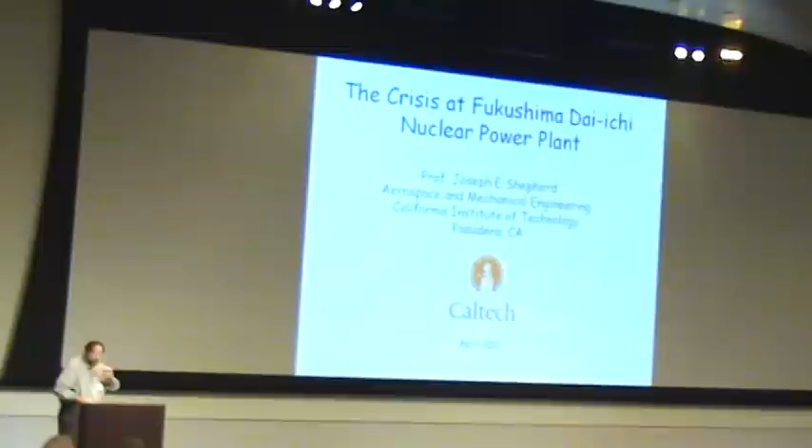But what this talk is all about is, I call this sort of Fukushima for scientists and engineers. So you've heard a lot of things on the news, and there's been a lot of so-called experts that get up and talk about things. And as I watched that stuff, my wife watched me getting disgusted, and she said, you know something about it, why don't you stand up and talk about it? And so that's one of the reasons why I'm here.

And there's a couple of purposes in this, and one is to give you an understanding of the reactor systems and how they're supposed to function, and then an understanding of what could have gone wrong, with a little bit of speculation, but actually I don't have any secret knowledge.

And so all I'm going to tell you is things that I learned off of, as they say nowadays, scraping the web and talking to a few people who are inside the nuclear industry, and my 30 years of experience in thinking about nuclear reactor safety, which started even before that, when I was a graduate student who worked at Oak Ridge. So here we go. So there's a number of nuclear power plants in Japan.

And they get about 30% of their electricity from that. They're heavily dependent on it. And right here on the coast are the plants that were affected the most by the earthquake and tsunami. And the plant we're going to be interested in is this one particular plant, which is Fukushima #1, or Dai-Ichi, and this actually contains 6 reactors.

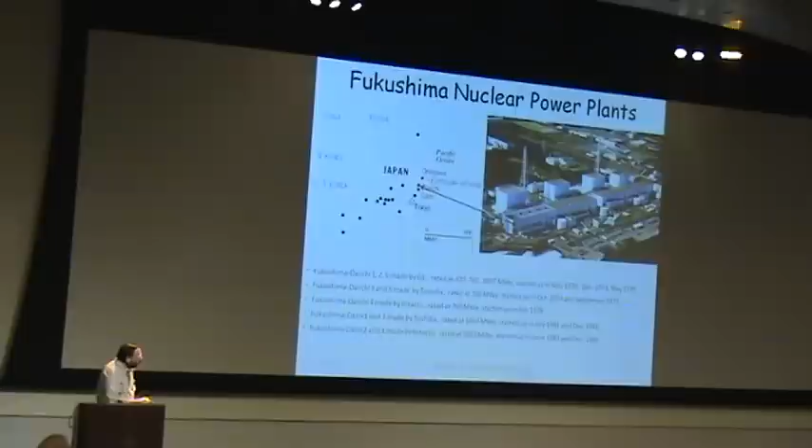These sets of buildings here are the turbine buildings, so these actually house the turbines and the generators, and there's a number of auxiliary buildings, large stacks to carry off the material. So the plants were designed in the late 50s and 60s and were built during the 60s, and the first one had its low power startup in 1970. It's been running since then. The other ones have startups that were a little bit later on in time. So these plants have been here for some time. The first plants were built by GE.

This is an audience of scientists and engineers who probably don't need this little bit of discussion, but just to remind ourselves, these are thermal power reactors, and so we have slow neutrons. The neutrons are moderated by water, and the neutrons have a large cross-section for fission when they're slow, and that means we make somewhere between 2 and 3 neutrons, a number of fission products, which are the things that cause us the greatest concern when we have a problem like we do today, plus about 200 MeV of energy, which is turned into thermal power in the form of high pressure, high temperature steam, which then produces electricity.

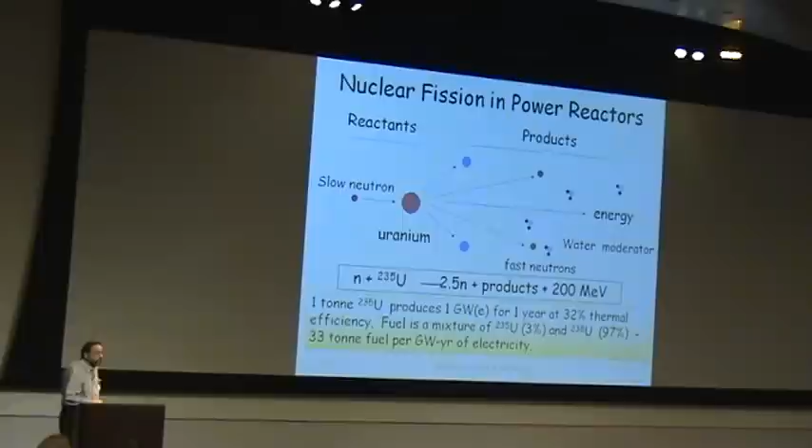And the thing that's, of course, greatly attractive about this is 1 ton of the isotope 235 will produce a gigawatt of electricity for 1 year. So that's what we're talking about here. And here's the actual internals. Each one of these reactors and associated systems consists of the following. It has a pressure vessel, it has some fuel inside of here, and it has a very large amount of water. This is a boiling water reactor. They all boil water, but in particular this one boils the water directly inside the reactor.

Up here on the top are what are called the dryers and separators, so that only the steam goes into the turbines, and then the water, after it goes through the turbines and spins the turbines and makes electricity, gets condensed by the condenser, and 70% of the energy actually goes in the ocean. These plants are on the order of 30 to 32% efficient, and so there's an enormous amount of water being circulated in here, 6 tons a second. It basically comes out of the pumps at about 180 degrees C, gets preheated, goes in the core, goes down, around, up, and out. So we're doing that day in, day out.

The capacity factors on nuclear plants are up on the order of 90 to 95% nowadays, and so these will run for probably a period of up to a year and a half before they have to go in and change out some of the fuel. So a lot of the events that we're going to be talking about have to do with how this structure and the associated components did or didn't work, and so you have to put the pressure vessel inside of the structure in order to protect it from both external events and internal events. And so the structure is a large reinforced concrete building.

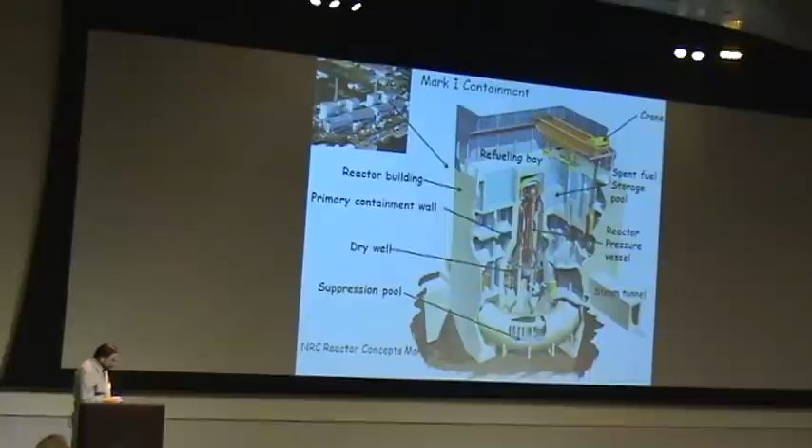One of the things you want to do is make sure if something goes wrong, that you're able to capture the fission products, and there's multiple layers to do that. One of the most important layers is the containment structure. And the first containment is the zirconium around the fuel rods, and they're actually pins, and there's thousands of these pins. They're grouped together in assemblies of about 63 pins each, and then you have several hundred of those assemblies. So that's the first barrier to the fission products, and it's all inside of the reactor pressure vessel.

The reactor pressure vessel is connected to high pressure piping and pumps, and then the whole thing is inside of the building. Here's what the assemblies look like, and so here you can see the set of pins, and they're about half an inch in diameter and on the order of 12 feet long, and they're full of little pellets of uranium dioxide, which is a mixture of the common isotope 238 and slightly enriched with 235, probably about 3%

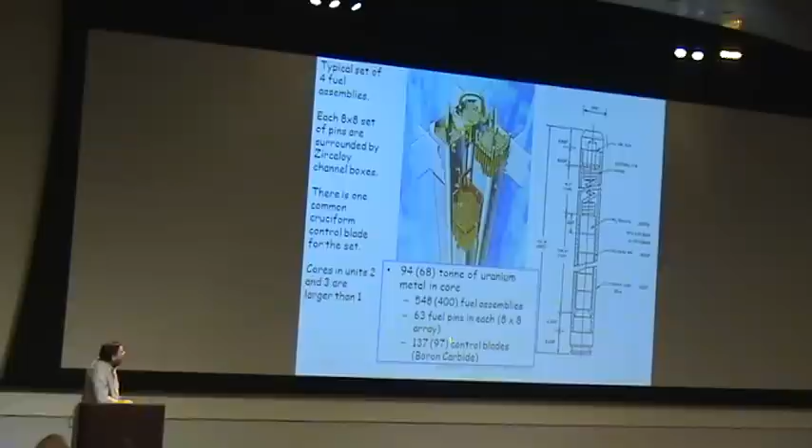for this reactor. There's a lot of uranium inside of this reactor. There's probably 68 tons in the little one and 94 tons in the two bigger ones. And in addition, there's a large amount of material that's used to control the reaction, boron carbide. And we talk about its control rods. There are rods down at the bottom, but they're actually blades here.

So here's the containment structure. This is a reactor that was built in the United States some time ago, but still operating. It's called Browns Ferry, and it's in Alabama. And this is the sphere. So the reactor pressure vessel is inside of here. You can imagine this reactor pressure vessel, which is about 20 meters high and 5 meters in diameter, sitting down inside of this structure. This structure itself is a pressure vessel that holds a little bit less pressure.

So the reactor pressure vessel itself is holding 70 atmospheres. This is designed for 4. We probably can go up to 8 and fail at some point beyond that. In addition to this sphere and this cylinder, there's a head that goes on the top, and that allows it to hold pressure. There's a number of hatches that seal it up. There's a lot of piping that goes in and out, and then there's a large torus down here in the bottom. You put a pool of water in that torus, and that plays an important role when you have an accident in terms of removing fission products and heat.

The whole thing is embedded in a very large amount of concrete, and that pressure vessel that we saw, that very substantial looking structure, doesn't even show up here. It's just a little thin line, and then there's all this concrete around it. And there's a whole lot of equipment and passageways that's not being shown here. We're showing the skeleton of what we have. And so this is called the containment vessel, or the primary containment.

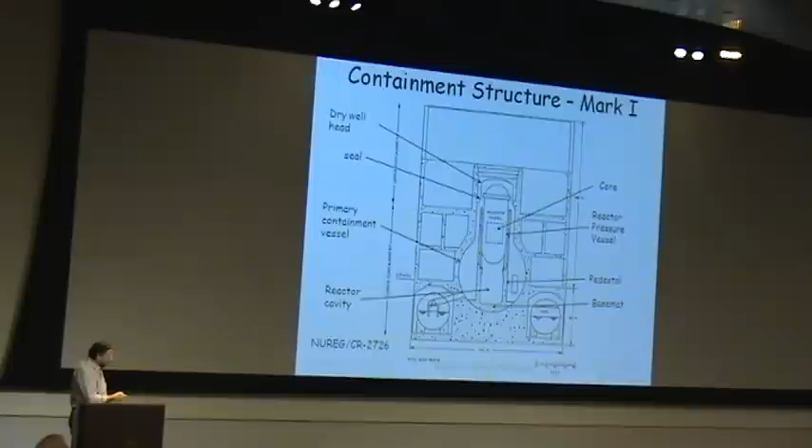And then here the cross-section of the torus. And then there's vent pipes that connect the sphere to the torus. And the notion is that this water will provide some suppression of any steam transients that get created. And then this volume will accommodate some of that. And then you have things like sprays in there to reduce the pressure.

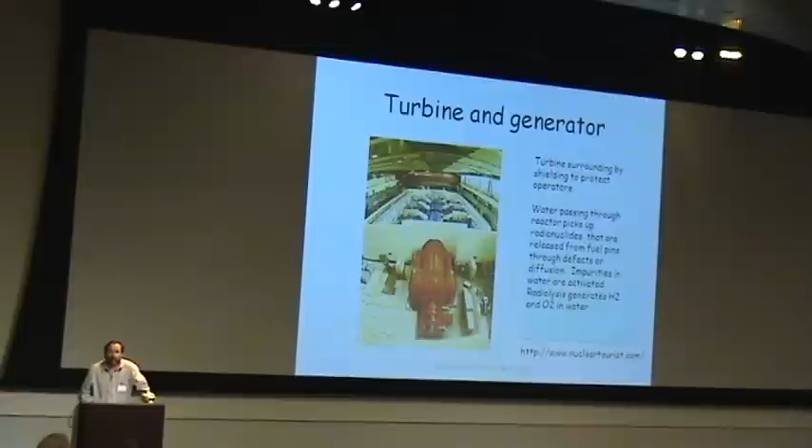So now the thing about the BWR is that it doesn't have a secondary heat exchanger. The PWR, which is the other kind of reactor that was developed by Admiral Rickover in the nuclear navy, was developed by Westinghouse. The PWR has a secondary heat exchanger. Actually, usually has several secondary heat exchangers. And the PWR is quite a complex design. And the BWR was actually developed as a civilian effort that came out of Argonne National Lab and Idaho National Laboratories. And the idea was to develop something that was simpler, a little easier to control. You didn't have to worry about having all the pressurizers and secondary heat exchangers and so on.

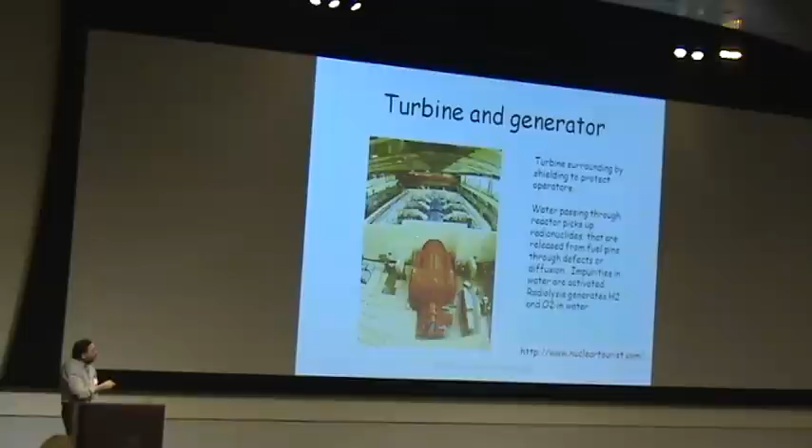But the drawback is that water that circulates inside the core also goes right into the turbines, and so this water picks up radioisotopes, and any impurities in the water can be activated. So it is radioactively hot, and that's why you have this large amount of shielding around the turbine. You've also heard discussions perhaps on the news about the water in the basement of this room being highly radioactive, and the water in the basement probably came from the 138 tons of water that's circulating through the system that comes directly into here.

So how do we control the reactor? The reactors are systems that you'd like to have negative feedback stability on. It's an obvious thing that you want when something has extremely large amounts of energy. You'd like that when you have a small perturbation, the system adjusts itself, reducing or increasing power to come back to the operating condition.

One way you do that is by designing it into the reactor, an engineering feature having to do with the neutronics and thermal hydraulics of the cooling. But the other thing you can do is actively put in control blades. Here are the control blades, these cruciform shapes, and control rods pushing up into the core, with a very large number of penetrations in the bottom of the reactor.

Nuclear engineers sometimes like to say that the BWR is an unnatural creature because the control is accomplished from the bottom rather than the top, as it is in the PWR. But if you put them in through the bottom, it's very easy to take the head off the top and exchange the fuel.

So one of the things they pay a lot of attention to is making sure they have systems to insert the control rods and the reactivity-controlling boron carbide blades very quickly in case of something like a large earthquake. There's a huge amount of machinery both in the turbine building and in the reactor building itself.

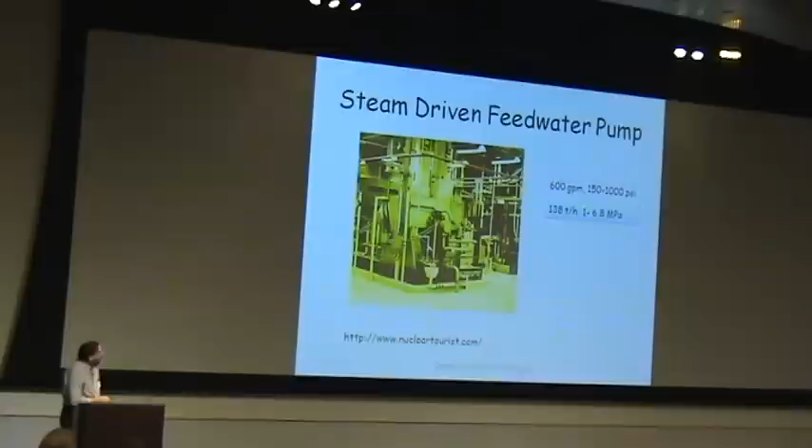For example, pumps that can move this massive amount of water around. In this case, this is a pump we'll be talking about a little later on. It's not driven by electricity, it's driven by steam, and it can actually move 138 tons an hour, which is not as much as 6 tons a second, but it's substantial.

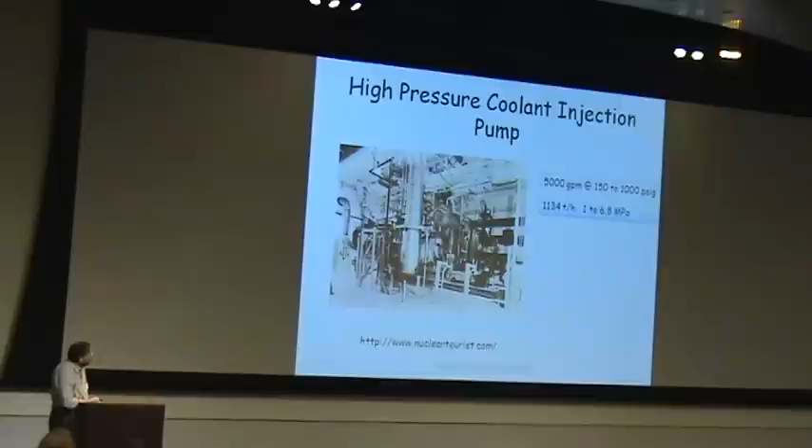Here's a high-pressure coolant injection pump. These are safety features, and these last two pumps I showed are actually not ones that are ordinarily used. These are not the feedwater pumps, but they're actually safety features.

We have additional safety features, and one important thing is it takes a substantial amount of electric power to run the instrumentation, the pumps, and the valves. You often worry about things like an upset in the grid. Surprisingly, even though you're generating hundreds of megawatts of electric power, you're relying on the grid itself for stability—you don't want to rely on your own ability to make that electric power to run your equipment.

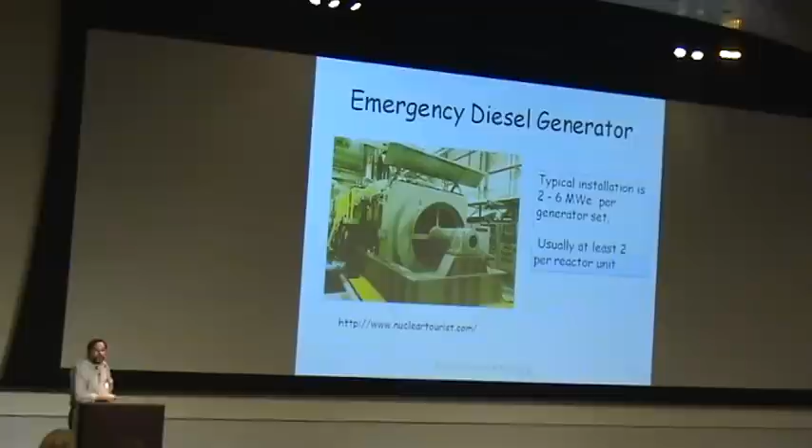So what you have are backup diesel generators, and not just one but multiple backup diesel generators. In this plant, probably between the 6 plants, it's something like 13 backup diesel generators. They're enormous things, generating somewhere between 2 and 6 megawatts per set.

Finally, if things really go south—the thing about backup generators, if you have experience with those, it's like starting a lawnmower after leaving it out in the shed all winter. You're probably going to have to drain the gas and make sure it actually will start. They spend a lot of time doing that.

Nevertheless, when you have equipment that runs intermittently, there are always issues about reliability, so they also incorporate a very large supply of batteries and inverters. They can run certain critical parts, but it's really only key instruments and controls—you obviously can't run those big pumps off of them. That's one of the issues here.

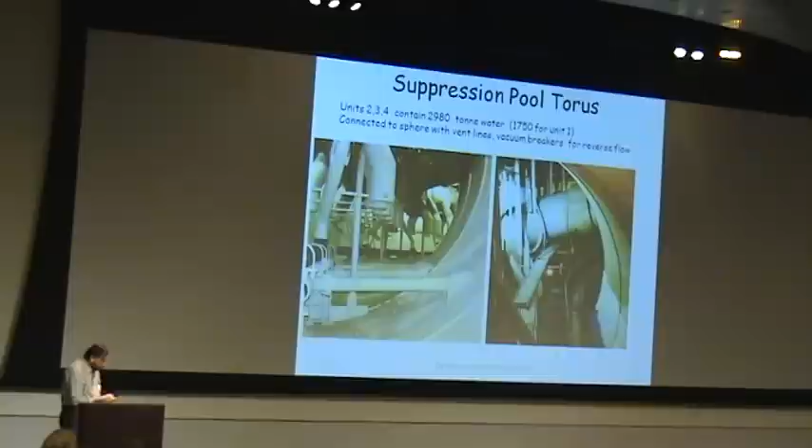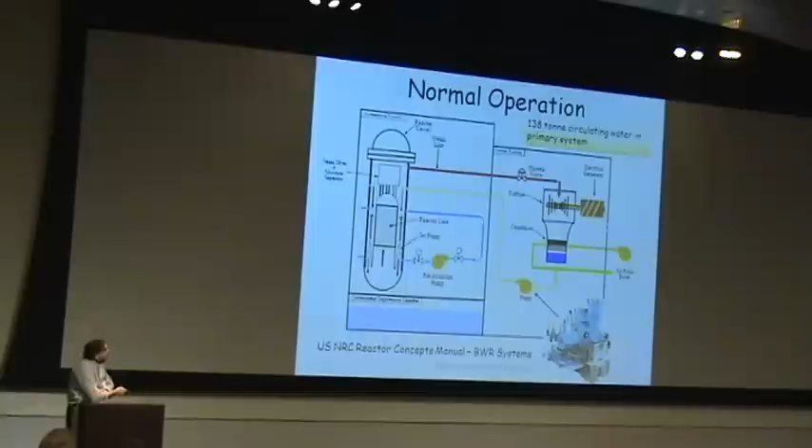Everything's happening just fine, and all of a sudden it says, okay, now stop. Any number of reasons why this could stop. It could be some kind of an upset in the feedwater. You're monitoring a lot of different conditions. You can imagine it's a very complex engineering system. There are many, many things that could trigger a shutdown, and it doesn't have to be an earthquake.

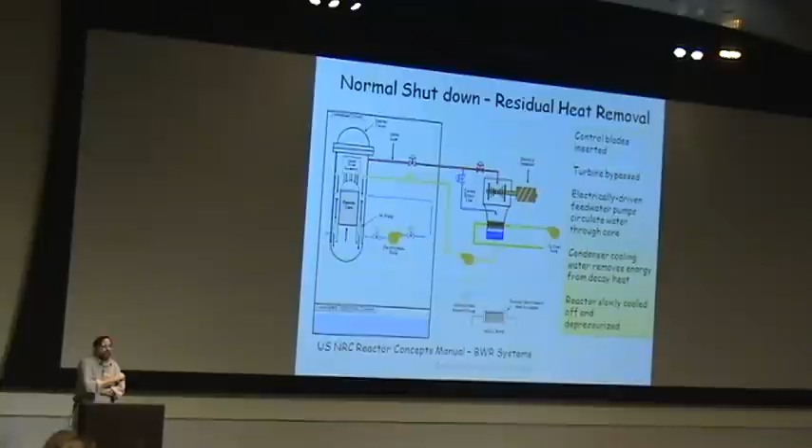An example is Three Mile Island, there was some kind of an upset of the feedwater. It's not really clear to this day what that upset was, but that triggered the whole event.

So once you get an upset, then what do you do? Well, immediately you push in the control rods, and those boron carbide blades go up into the reactor core, and you stop almost all of the heat from coming out.

And that's an important point. It turns out you can't completely eliminate all of it. All you've really done is try to intercept all of the neutrons, and you spoil the whole chain reaction that's taking place, but you're left with a problem that it's still quite hot, and also it turns out there is some spontaneous radioactive decay you have to take care of.

So you still have to be pumping water around here, and you continue to do that, but you bypass yourself around the turbine, and you close this main steam isolation valve, and you run through your condenser in the usual way, and you also have to be running the water in from the ocean.

So this then goes on for some time. You have to do this for a period of weeks to get this thing cooled down to the point where you get to actually what they call cold shutdown, and you can pull the head off of it and start working on it.

So now, what's the concern? The concern here is that what we're doing is we're burning U-235. We burn the U-235 in sort of the loose chemical sense, and we have these interactions with neutrons. We're making a lot of stuff that we would really rather not have, and those are the fission products. And so we don't burn all of the U-235. Some of it's going to be left after the fuel spends about 3 years in the reactor.

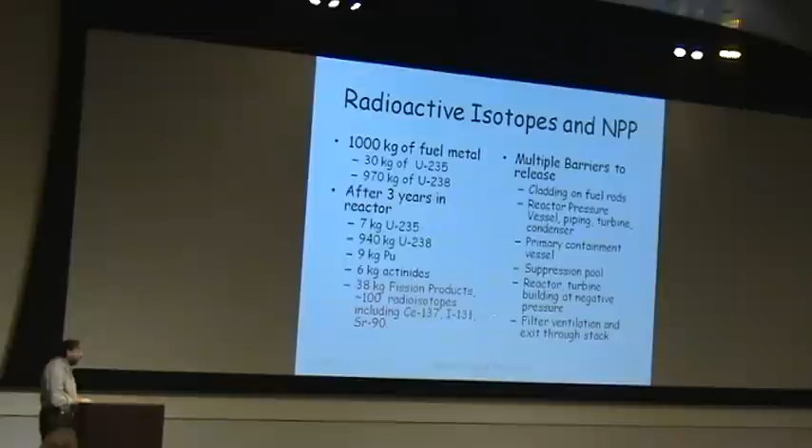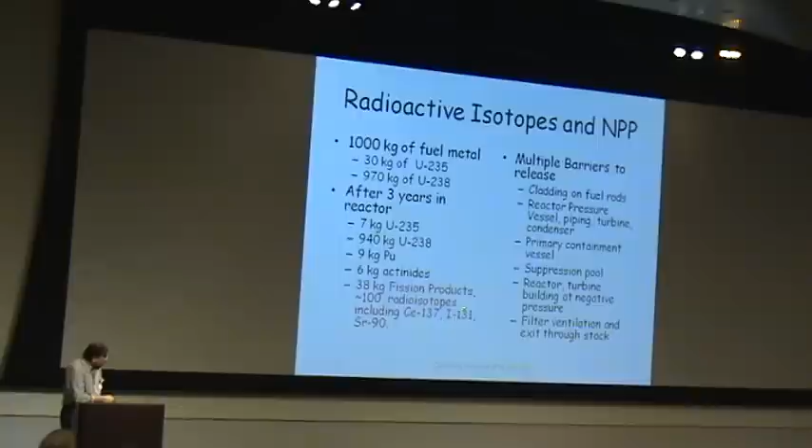And then there's a lot of things that you really don't want to get out in the environment. In particular, you've heard a lot of focus on things like cesium-137 and iodine. It's a lot per core. 38 kilograms is an enormous amount of radioactivity because the decay rate, for example, in the iodine is 8 days, and the cesium is 30 years, so it's pretty intensely radioactive.

The problem is that some of these materials are undergoing spontaneous decay. Fission products are the juvenile delinquents of the atomic world. They're unstable. They have too many neutrons. They have to get rid of the neutrons. They undergo beta decay, and when they do that, they release about one MeV of energy per each decay. There's a decay chain, and it might be, say, seven nuclides long before it gets to a stable compound and stops. So it's not going to stop till it gets to stability.

That can take, in some cases, tens of thousands of years, but for many of the fission products, they decay very quickly, and all that decay comes with energy. As soon as you shut down the power to the reactor by inserting the control rods, you're still left with this decay heat, about 7% of the full thermal power. In Unit 1, we were making 1,380 megawatts of thermal power, and even shut down as much as possible, we're left with about 90 megawatts right at that point.

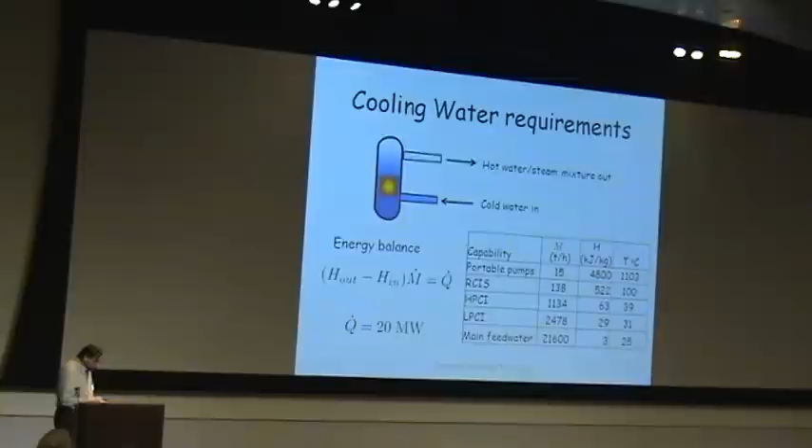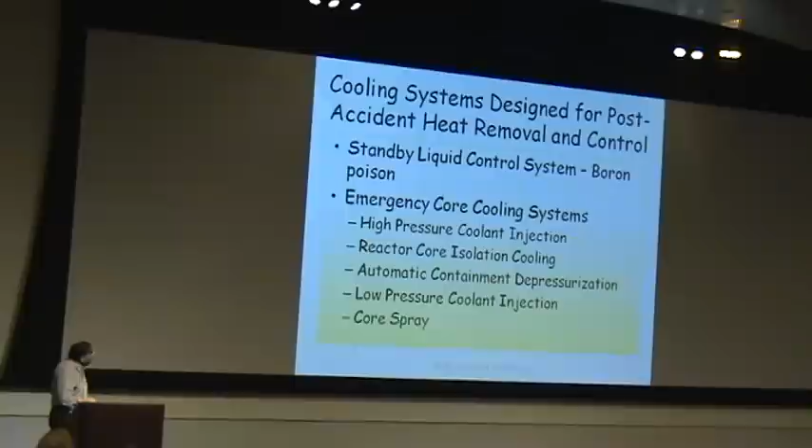So what do you do? You worry about that a lot. You say, okay, I'm going to put all kinds of systems in. First of all, the control rods go in. I'm going to have some boron poison I can flow in there to get rid of it. If the main cooling system fails, I'm going to have 1, 2, 3, 4, 5 different kinds of things I can do. So that is fantastic - you have a lot of backup systems, lots of duplicate things, whole trains of diesel generators and all that stuff.

But it turns out that only one of these things can work without electricity, and that's this one right here. None of these other beautifully engineered systems - the removal of heat from the suppression pool, the injection of water at high pressure or low pressure - none of those require... well, actually all of those things require very substantial amounts of electricity. And then you're left with this one device here, a steam-driven pump.

So, okay, now you are all experts on nuclear power and nuclear reactor safety, and now we're going to walk through the accident.

When the electrical grid fails and the plant shakes that much, you have multiple sensors telling you something very bad is happening here, we are shutting this plant down. At that point, the reactor shutdown was initiated. One cause of concern, of course, is then there's a very long series of aftershocks. Today, this morning, late at night in Japan, they had a very large aftershock take place. Some of these aftershocks probably played a role in the accident, although that's not clear yet.

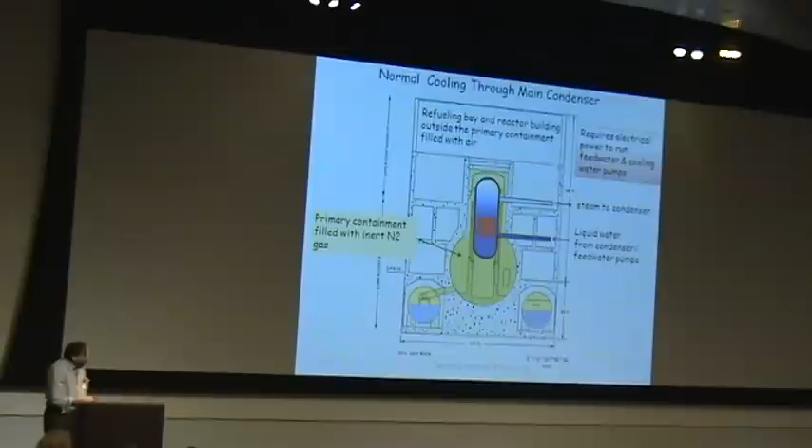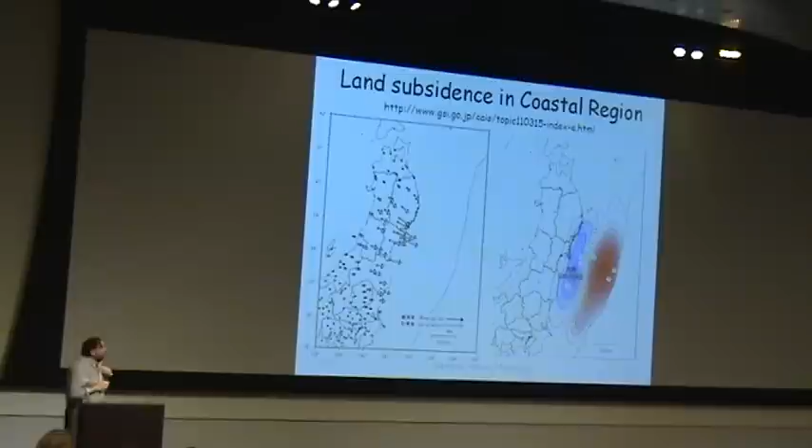So this is just an enormous series of external events. At that point, all 13 backup generators failed. Now, some of those backup generators were brought online relatively quickly, and they brought in some additional portable generators, but the generators that were most important, for units 1, 2, 3, and 4, failed. In fact, they failed in such a way that they couldn't be recovered. One of the problems was this enormous amount of damage done by the combination of the earthquake and the tsunami—this is a lot of debris that was up on the dock.

So here's the accident progression. The Japanese have been excoriated a little bit in the press for not being forthcoming, but actually if you go look on the website—it's not clear how accurate the information is—but they publish things right down to the minute when various things happen. If you go to the Japanese Nuclear Safety Agency, you can get a lot of this information, which is what I've done. Some of the information seems to be a little bit anecdotal.

But here we are: the reactor shut down when the earthquake happened at 1446, then we had the shutdown, we're shut down, and then the tsunami reaches. After the tsunami reaches, we suddenly find we're in a situation where we have to rely on batteries, and that is a very serious thing, because now you can't run any of these systems except for just the one heat removal system that you have.

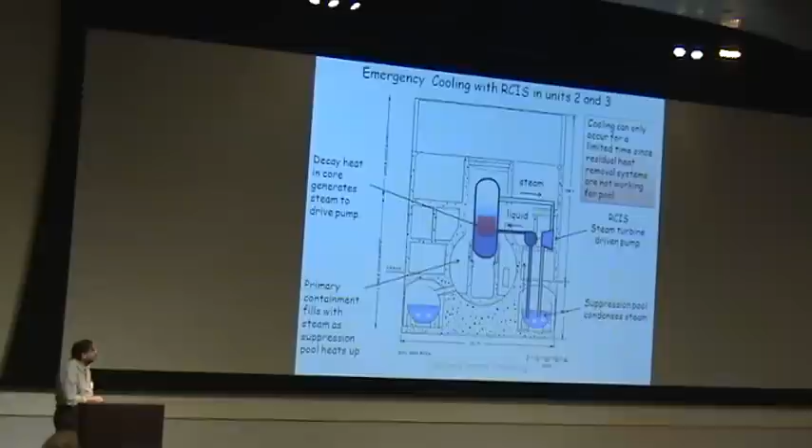At some point, you're going to start boiling the water and pressurizing the primary container, which is still supposed to be full of nitrogen unless it started to leak out during the earthquake. All this is very alarming, and the Japanese had been through a very serious accident in 1999 at a reprocessing plant where there was a lot of miscommunication.

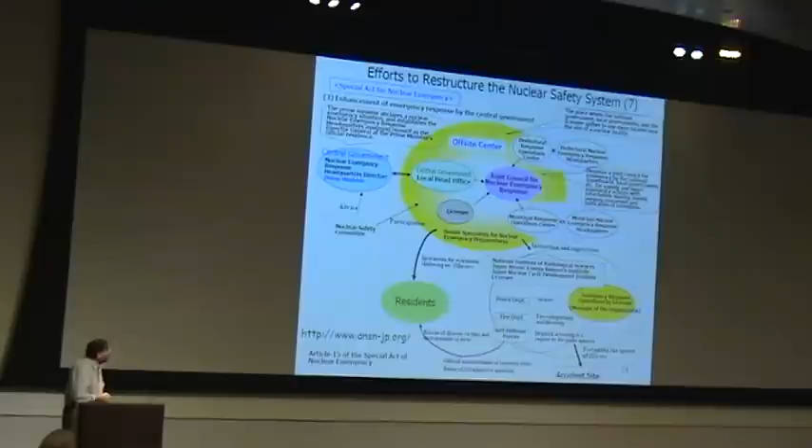It was very badly handled, and as a consequence, they constructed this system of notifications. So this is what's supposed to happen. There's a whole lot of people involved. Societies are complex, and you're going to have to tell a lot of people what's going on, and figure out how to deal with everybody: self-defense forces, fire department, police department. They said these things are such a challenge to our society that at the end of the day, we're going to kick it all upstairs to the Prime Minister. That's why you see the Prime Minister on television. As I say when I give this talk, it's a good thing he's a physicist, so he can evaluate all of these things he's being told. Hopefully he has a whole lot of other people giving advice about that, which I'm sure he does.

So this is the system they have. Now TEPCO's on the phone to the ministry, the ministry's on the phone to the Prime Minister, and they're saying: here's the deal. We're pushing steam into these suppression pools, boiling the water off the pool we're using to condense it, and we've gotten to the point where we can't cool it anymore. What are we going to do?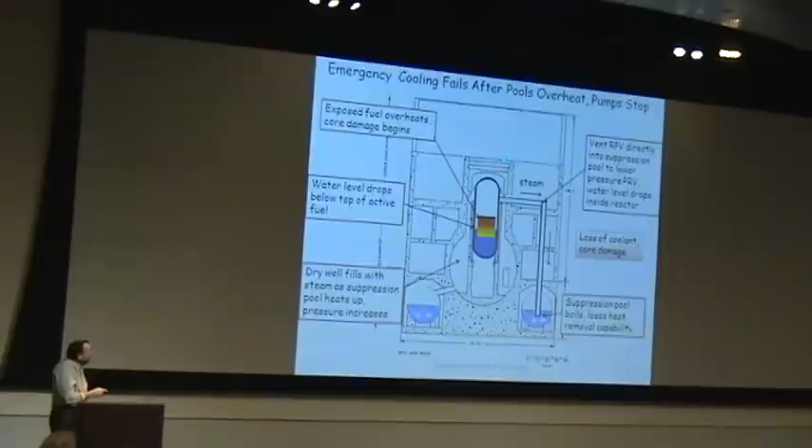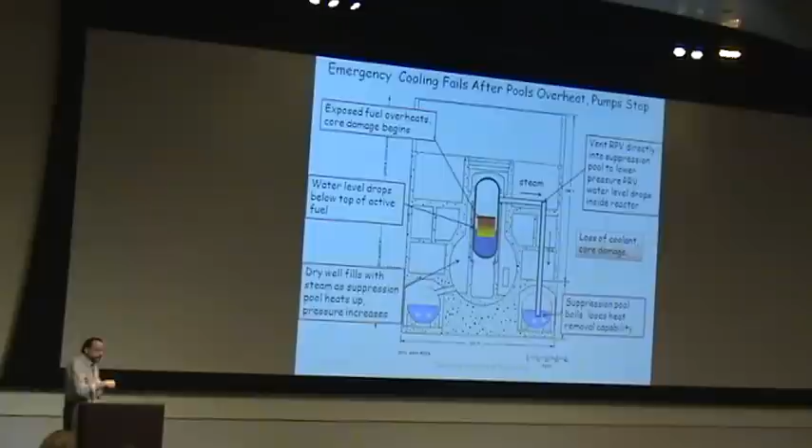Well, one of the things you don't want to do is fail this reactor pressure vessel—that's one of your lines of defense. You also don't want to fail the other line of defense, the outer containment vessel. So in order to keep the pressure from going up, you have to get rid of some of that steam. When you get rid of some of that steam, it's the same thing that happens when you take the top off a pressure cooker—a lot of steam flashes and you start losing inventory, so you start uncovering the core. It's more complicated in the BWR because it has a lot of steam anyway, but you end up with a lot more steam and a large portion of the core uncovered.

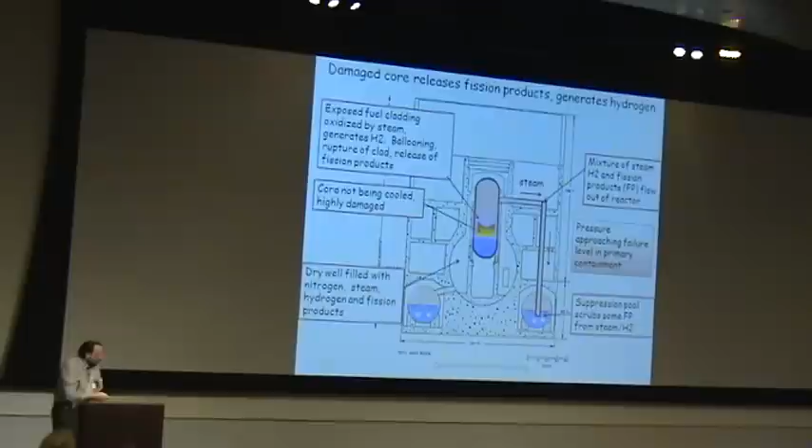So now the really bad thing begins to happen. This is where I came in—not that I did the bad thing, but this is the part I spent a lot of time thinking about when I was at Sandia Labs. What happens is if you get the core too hot—remember you've got all these little pellets the size of your fingertip, tens of thousands of pellets of uranium dioxide, inside a zirconium rod with cladding only 1 millimeter thick.

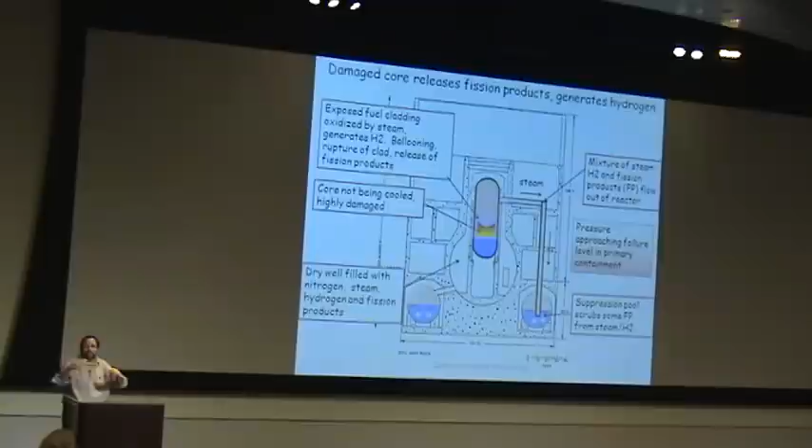If you get that too hot, it turns out all those fission products—a lot of them are gases, like krypton and xenon—are at high pressure, and they cause the cladding to balloon and rupture, releasing the fission products. At the same time, the zirconium is getting hot, you've got steam in there, and the steam oxidizes the zirconium and makes hydrogen. So now you've gone from a worse situation to a really terrible situation.

You've still got nitrogen in there, so you say, thank God I filled the whole thing up with nitrogen. But then the reactor pressure starts going up. So here we are on Saturday—the tsunami and earthquake happened Friday, and now it's Saturday. They're measuring the pressure, the estimates are still coming in, and they're at 600 kilopascals, now 800 kilopascals. Remember what I said—this is inside the primary containment. It's designed for 400. You start to worry about it failing when it gets to 800.

It probably will definitely fail at 1,000. And so here you are getting ready to fail. All right, so what do you do? You say, well, what we're going to do, we're just going to let some of that steam out of the primary containment. Now, that's something that people have talked about a lot with these reactors.

The problem with it is this, that you're going to release fission products directly in the environment. You hope that some of those fission products are going to go through the suppression pool and get scrubbed out, but the fact of the matter is a number of those will probably just go right on through and out in the environment. The other problem is, where is that going to go? Where are you going to put this material?

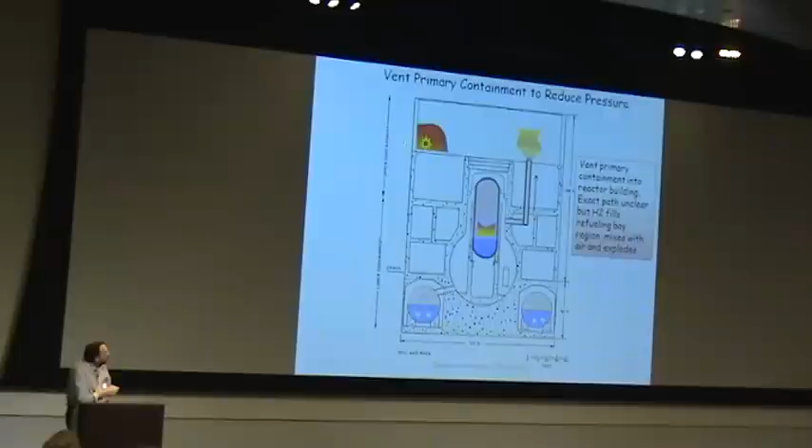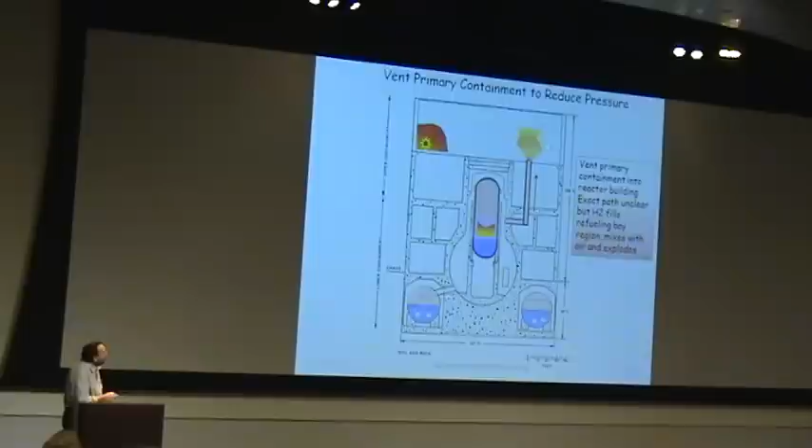So we had to vent directly out of the primary containment, and we had to vent into the reactor building, and this reactor building is actually designed to fail gracefully. Now, it didn't fail gracefully. You saw the pictures. The first one failed more or less gracefully, if such a thing is possible. But that means you have a very low overpressure failure for the panels that are on the top here. But then you're going to have to deal with resulting debris and damage up here, because this is also where you have the fuel.

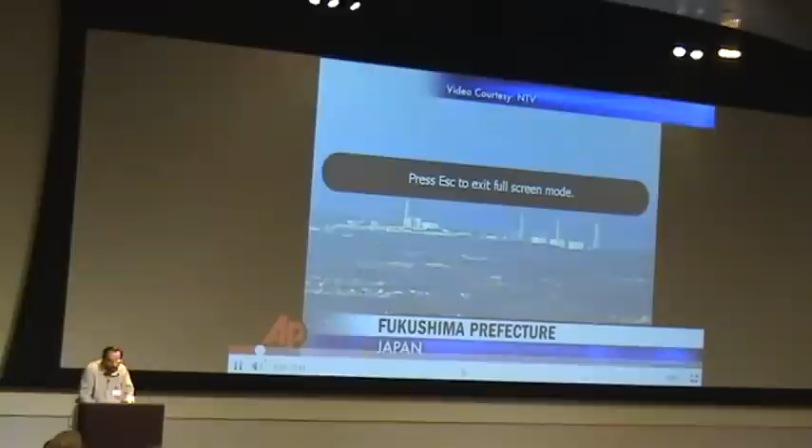So, here's the explosion. It was pretty horrifying to see this if you're involved in engineering, and it's the kind of thing that just absolutely should not happen. And if I can get this thing to talk to the web and pull this up, then you can see what this looks like. So here's where it'll play this back in a minute. So you can see this enormous cloud here.

So what is that cloud? Well, that cloud is probably a lot of pulverized concrete and steam, because the panels, even though they're blowout panels, the panels are made out of, there you go. And you can see there's a tremendous jet that went up in the air. So it was just an absolutely heartbreaking thing to see that happen, and then to think about the fact that there were all these fission products inside this cloud, which are now off drifting to the northwest, and we'll see where they wind up a little later on. So that's what happened there.

And now, so what blew up? Well, what blew up was this area right here on the top, and all of this superstructure you can see. That's all of this superstructure that was designed to hold on these panels. And so, in some sense, you say, well, the safety system worked. We blew off the panels, and hopefully we didn't damage a couple of key things we're going to need to recover this accident, which is the crane.

We didn't damage the fuel pool, and we didn't damage the reactor, which is way down inside of this, underneath this concrete shield, and the upper part of the retaining vessel. But we actually don't know. We don't know what the condition of that is. So, okay. So now what are you thinking about? Well, there's still other things that can happen.

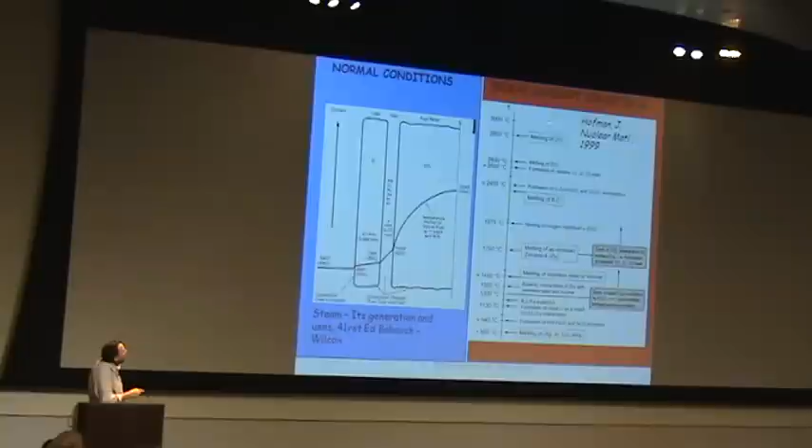So this is what you're going to have when you've got water flowing by here and you're extracting the heat. All of you who've done the heat transfer calculations will know what's going to happen if I insulate this bundle: basically we're going to float up to a common temperature, and then that temperature is going to go up and up and up until we balance the internal heat generation with the heat losses. You go from a situation where you start to oxidize the zircaloy and make hydrogen, then you start to actually melt the zircaloy, then you dissolve the zircaloy in the uranium, and then you finally melt the boron carbide. At the end of the day, you could actually get up to these kinds of temperatures. You could melt the uranium dioxide, and that forms a eutectic with this zirconium, and it drops down into the bottom of the core.

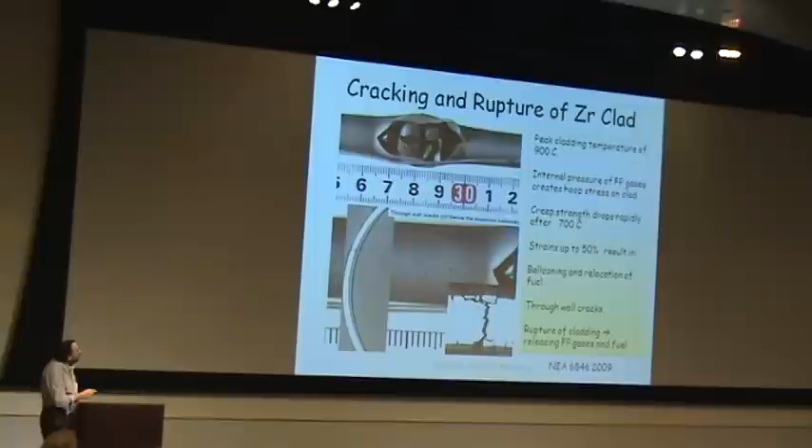This is the kind of thing that can happen when you just have a ballooning and rupture of the clad, but you can also get a lot of fractures in there, and that's how the fission products get released into the water, and that's why there's so much fission products. So hydrogen comes out quickly, and of course it accelerates with temperature, and it releases energy. So it's a self-accelerating reaction. You're basically burning metal; you can burn metals in steam, and this releases a substantial amount of energy, and that contributes to the process running away.

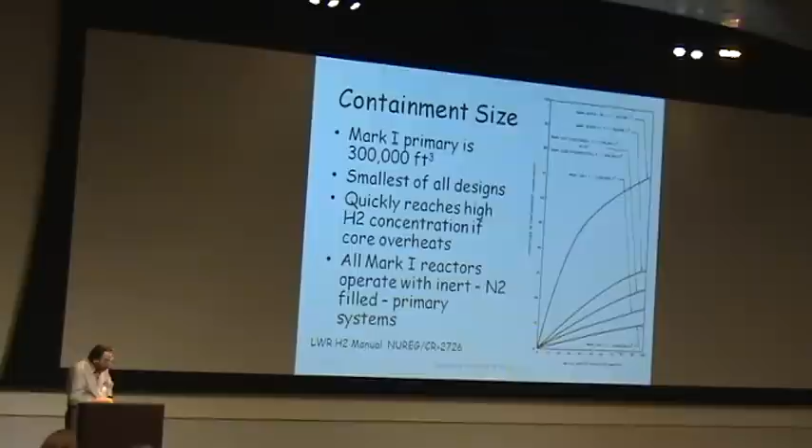Where does all that hydrogen go? Well, the hydrogen goes into containment. If you go into the primary containment on the Mark I, you can really fill it up and get a lot of hydrogen. If you have all the metal and water react, you can fill it up with 70% hydrogen. But in fact, we're not going to fill up the containment. After we fill up the containment, we're going to vent it out into this reactor bay, which is about 1 million cubic feet. So the concentration is not quite so high, but the concentration is still extremely high.

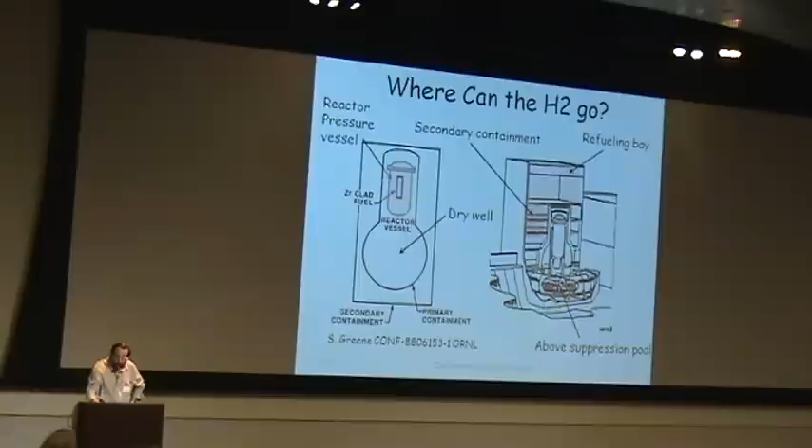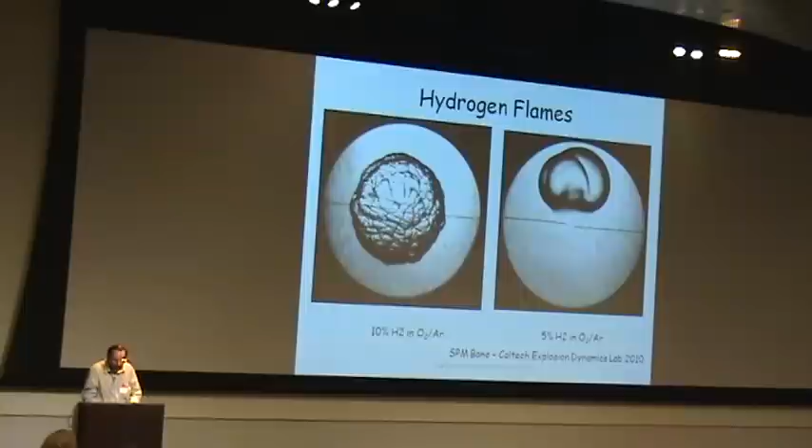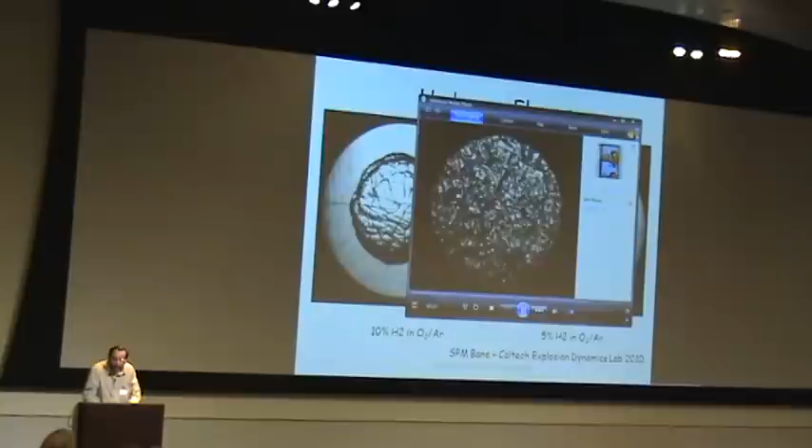What does happen is if you have a very low concentration of hydrogen, you get a buoyancy effect. These are some pictures of flames taken with high-speed video in my lab. Here's a picture that shows what you have with about 10% hydrogen, and you can see this very corrugated, convoluted surface because it's naturally unstable. If you go down to about 5% hydrogen, you have a substantial effect of buoyancy, and you create a vortex inside here that drags the flame up to the top. You still get very substantial overpressures.

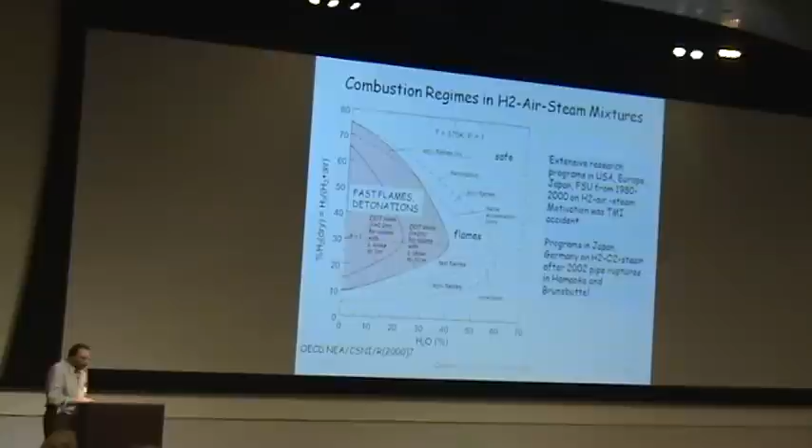So here we are, failed the secondary containment, but even worse things can happen. Those low-speed flames in the pictures I showed you are only going a few tens of meters a second. If you have enough hydrogen concentration and a small enough amount of steam, you can actually get detonations with very high-speed combustion, moving at 1,600 to 2,000 meters a second, and this produces an impulsive type of load and a much more destructive event.

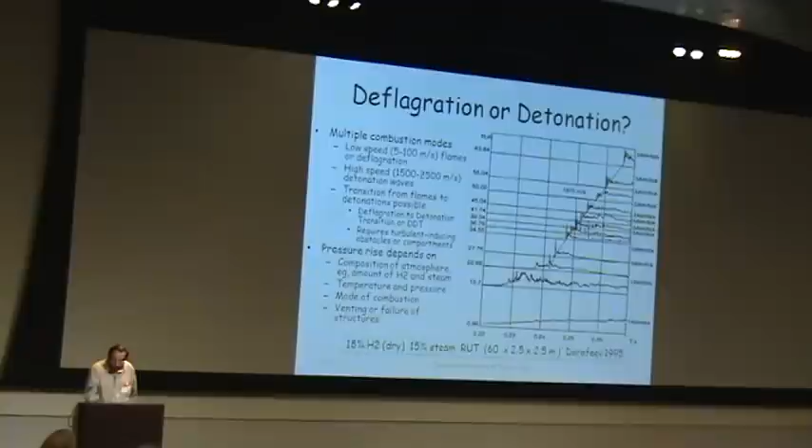So, next unit, unit 3. Here we are in unit 3, and one of the things happening is we're running on batteries. We still haven't been able to recover, so now we're into Sunday. This all started on Friday afternoon, goes into Sunday, and now we find that successively the batteries are running out, and in addition, the reactor core isolation cooling system fails. So now we're beginning to wonder what's going to happen. It's still working in Unit 2, so Unit 3 is failing, Unit 2 is still working.

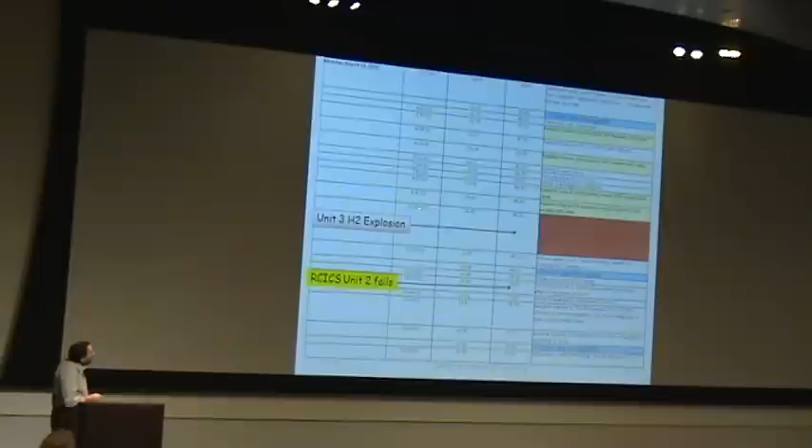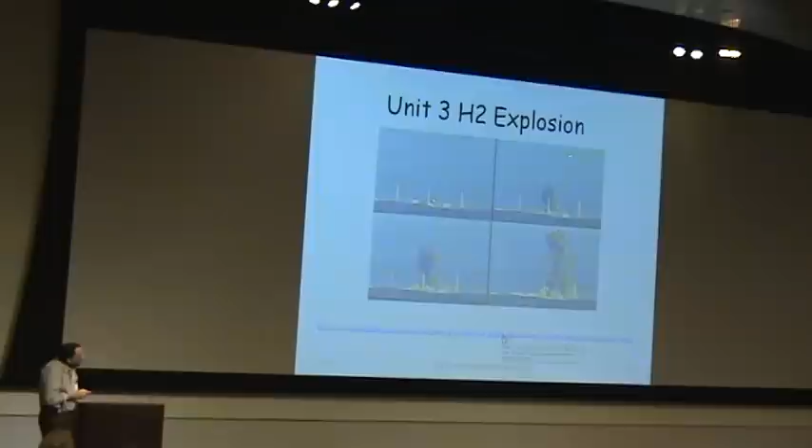I tried to estimate that, but maybe we went up 500 to 700 meters, just the visible part of it. And that's extremely energetic. So, what are those towers? What's that? Those towers? So these towers are the so-called, there's the top of the cloud, you can see.

These towers are what are called the stacks, and what they do is they take filtered air out of the reactor buildings and the turbine buildings, and see that little flash of flame right there? It's an enormous cloud, and then you can see bits of stuff that come falling back down. It's just unbelievable.

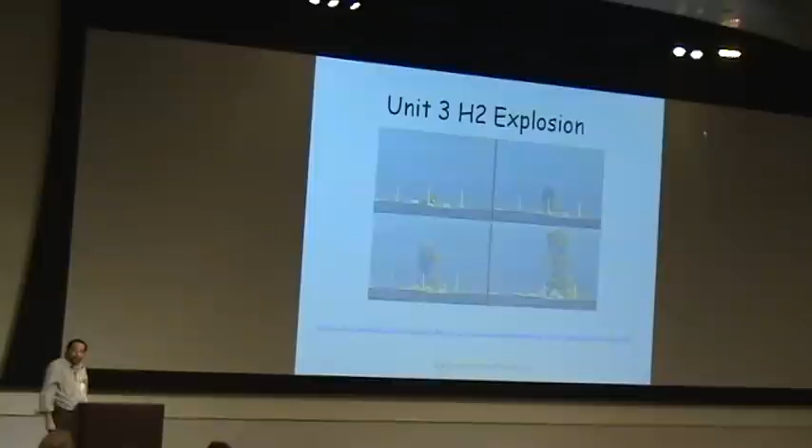So what those stacks do is that you have to ventilate the buildings, and you have to filter out the particulates, and you have to try to trap out any of the radionuclides, and so you run it through some HEPA filters and some activated carbon, and then you try to push it as far up in the atmosphere as you can so it doesn't come down in the local vicinity. So that's what the stacks are for. This is the result. It's pretty horrific.

So what it did in this case was, now you can see that superstructure is not left at all. The superstructure, in fact, has fallen into the reactor, and what's an even greater concern is it's fallen into where those spent fuel pools are. So now we have two reactors that have destroyed the superstructure. This reactor number 3 had this enormous explosion that's heard 50 kilometers away.

And now what's next? Well, what's next is we're not done yet, because reactor 2 is still sitting there. And what happens is that we successively, very quickly have events in reactor 2 and reactor 4. It's really not clear what happens in reactor 2, but apparently there's something that was not good. There was an explosive sound near the torus. And then reactor 4, now reactor 4 doesn't have any fuel in it, so what's going on there?

Well, it doesn't have any fuel in it, but it has about 1,000 fuel assemblies sitting in the water in the spent fuel pool, because they're working on reactor 4. They took the assemblies out so they could go in and work on what's called the shroud. And they've been busy working on that. They have to store the fuel somewhere, and so that pool is quite full of fuel, and that fuel was taken out in November, and so it still has a substantial amount of decay heat, and so there's a concern about what's going on there.

So what may have happened is that the water may have boiled off of the pool to the point where we exposed the cladding. Do some rough mass energy balance calculations, probably take about a day. We're no longer cooling the rods, and they start generating hydrogen with the steam that's coming off the pool underneath that's boiling. You make hydrogen, the hydrogen starts to burn, so you have a fire. So this is a very bad thing to have, of course.

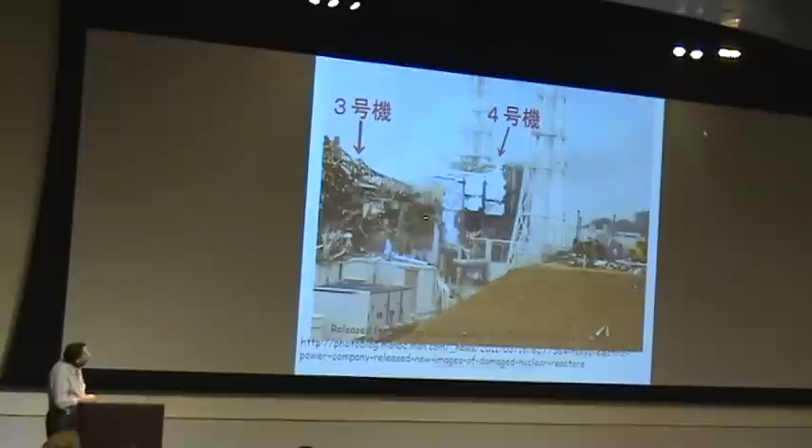And then, in addition to that, you seem to generate a lot of hydrogen, which gets into the reactor building and has an explosion. The upshot of all this is that it severely damaged reactor 4. So here was that for reactor 3. You can see how a lot of the material has just been completely torn off of here from that enormous explosion. But here's reactor 4 now, and reactor 4 has a very large amount of damage into it also, so it had both a fire and an explosion.

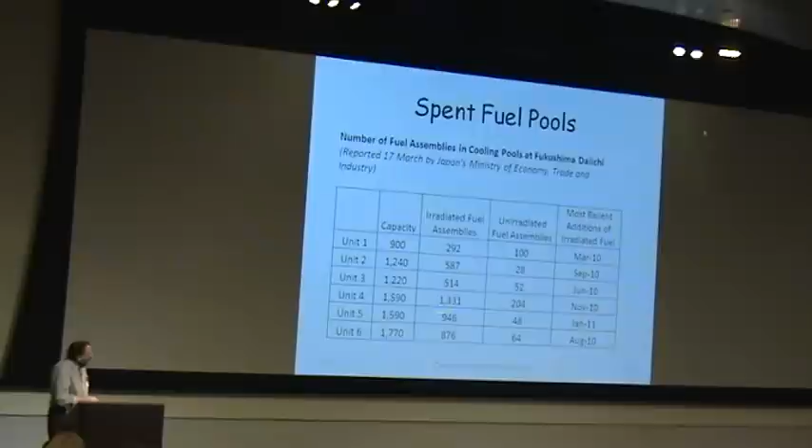And you can see here, for example, into the building, and this is a piece of the crane, and you can see all of the panels have been torn off and the roof is collapsed. So this is looking down on unit 3 again. Here's looking at unit 4, and here's what the real concern is: the spent fuel pool in unit 4, which has the 1,330 irradiated fuel assemblies, and the last addition was probably on November the 10th, when they took the entire core out. The entire core is about 500 assemblies in units 2, 3, and 4. So a very large amount of decay heat there, and that's why those fuels have to be kept cool.

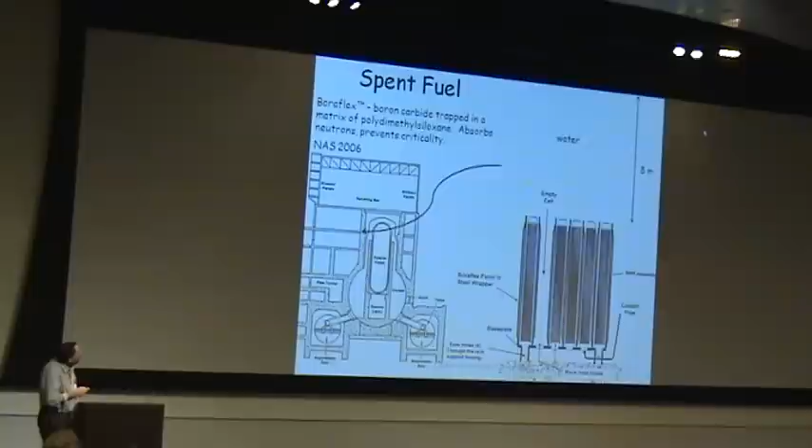And what's going on in those pools? Well, the pools are here, roughly speaking, and down at the bottom there's about 3 or 4 meters of these fuel rod assemblies. They're put into racks. The racks are separated by what's called Boraflex. It's a polydimethyl siloxane, which has some boron in it, which is a super absorber of neutrons, and then there's a whole lot of water on top of it as a biological shield.

And what's happening is this is sitting here boiling, because ordinarily you have to run a heat removal system, a heat exchanger running to pull out all that heat. You've got 10 megawatts in this pool, just like you do in the reactor, because the reactor itself is hot. You can figure out what's going to happen there, and it's going to be something bad.

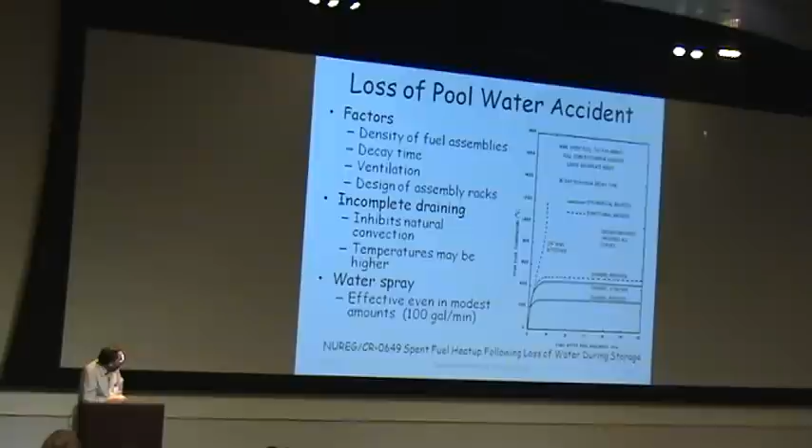This is an example of what can happen if you remove the water. After you've drained the pool out, you'll start to have a self-accelerating reaction, and you'll go up very high in temperature. If you remember this number, 1200 degrees, that's when you start to make hydrogen. So there was a very substantial fire, and now this building has exploded and burned down.

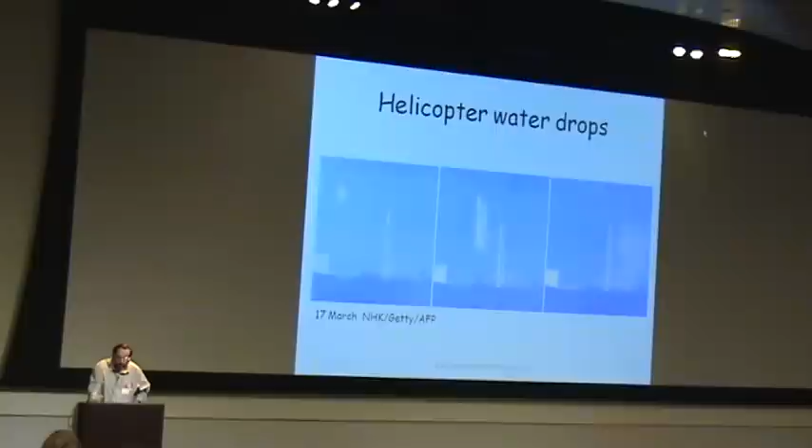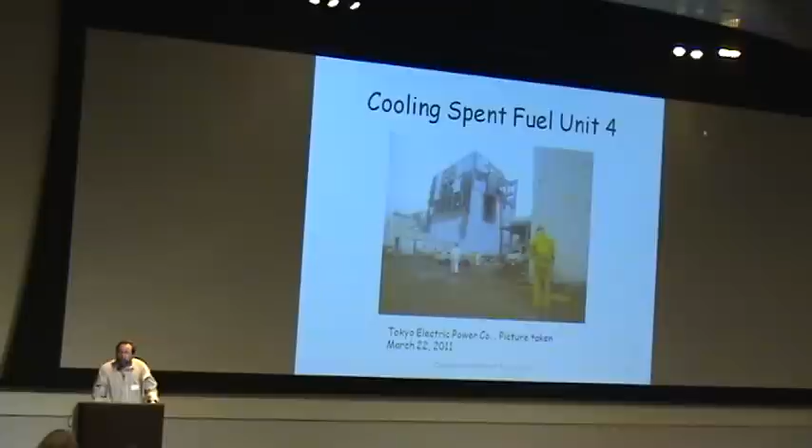And the final solution they came up with is these specialty concrete pumping trucks. There's a stroke up here on the top, and what they're doing is running fire line coming from a pool where they have some temporary storage. They started out with seawater, went to fresh water, and all the way up into the top is now pumping water into that pool. That pool holds about 1,000 tons, so you need to be able to put the 1,000 tons in there, and then replace whatever is evaporating because you don't have your heat removal system working.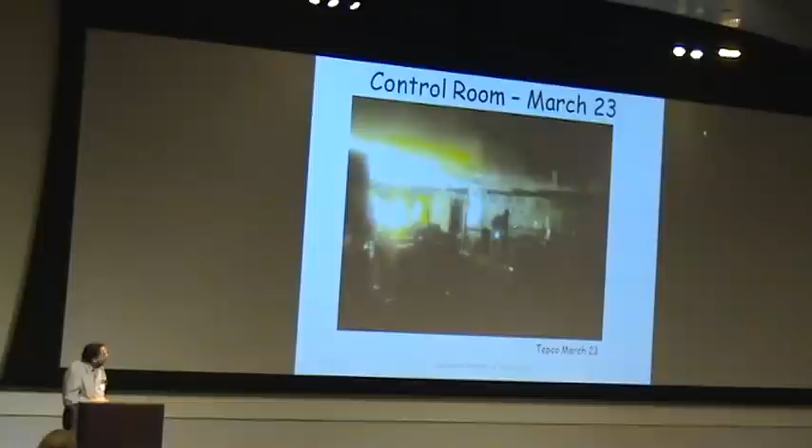You're trying to figure out how to do all this stuff under absolutely horrific conditions. So here you are in the control room in the dark, and it's radioactive, and you've got your suit on, and you're trying to piece together what has gone on here. Just absolutely horrible conditions to try to do engineering.

And finally you get the lights back on, but even then you're standing around looking at a lot of blank screens and blank dials, because a lot of this stuff is not working since you haven't turned power on to the rest of the plant, because you're worried about what's going to happen when you do that. You really need to go in there and inspect it, but it's way too radioactive and hot to do anything about that. You can't get in there.

So here's the current situation. The IAEA has been reading all the reports, and they have a lot of folks who think about this, as well as every other group interested in nuclear power, and they've been saying the situation remains very serious, ever since the event took place. What do they mean by that? You read between the lines, it means the situation is very precarious. You have failed all of your lines of defense.

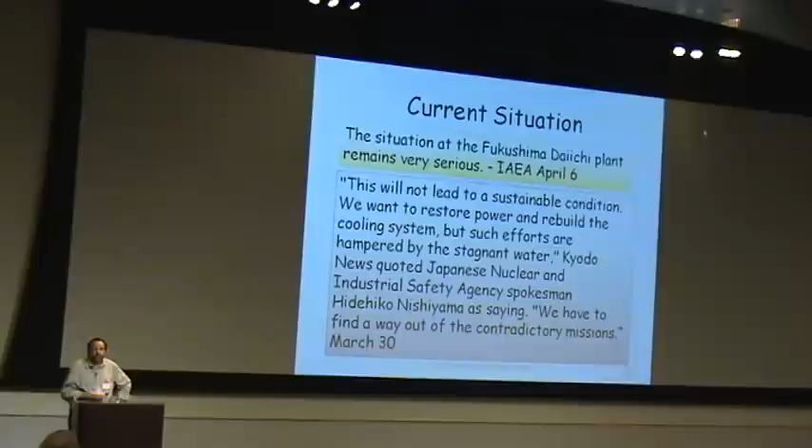You have melted the core to some extent. You have ruptured the fuel rods. You're not sure if all the pressure vessels have integrity. You're not sure if the containment has integrity. The building has certainly failed. Your ventilation system doesn't work anymore. You're blind because a lot of your instrumentation doesn't work. And what you're basically doing is just trying to hang on by putting water in there to take out that decay heat. So you're struggling with not the second law, but just the first law of thermodynamics.

So then the problem is, of course, that this is a total loss of cooling, right? You're pumping water in there and it's evaporating, or it's running off into some catch area hopefully, or worse, as it was for a while, running out to the ocean. So you've got to get out of that situation. You've eventually got to get your residual heat removal systems working, or else you're going to have to give up on trying to ever recover those cores and just let them melt down.

So that's what your storage requirements are. You say, well, 1,000 tons a day, I can do that for a few days. Well, you might have to do this for years. So you look at the time it takes to recover all those systems, decontaminate the reactor, get all that stuff working, come up with a strategy. You might have to sit there and cool those things for an exceedingly long term.

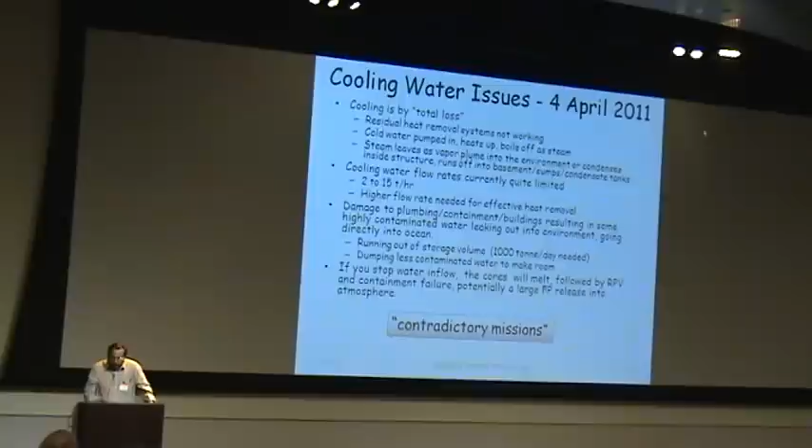And so that's where the problem comes from. I've been talking for quite a while and tried to give you some information about this. I didn't tell you everything that I know about it because I know that you'd all go to sleep. But I can take some questions and we can talk about other issues. Thank you.

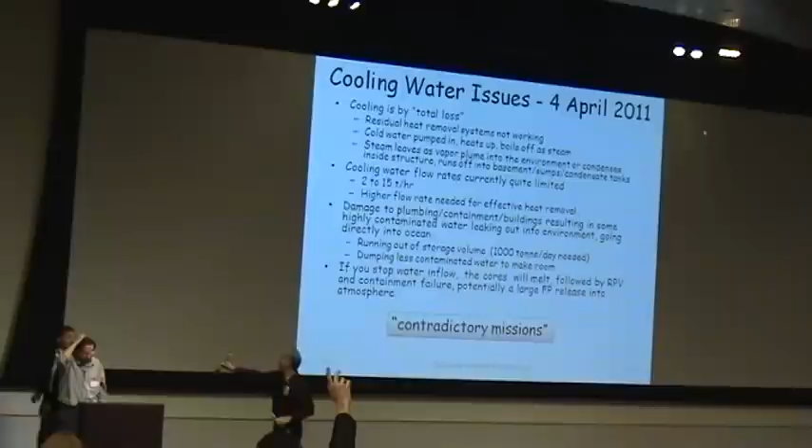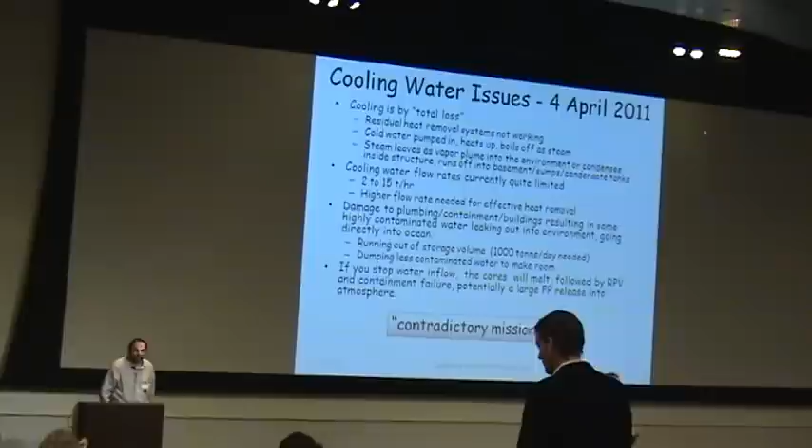Did they have the option or the ability to vent the hydrogen directly to the atmosphere, perhaps through the vent stacks? So what the Regulatory Commission told the operators in the United States in 1989 — they looked at this. We had a very long exercise in the 1980s after Three Mile Island about what to do with degraded core accidents, which is a technical term for these in these BWRs, especially the Mark Ones. They said, hey, what you guys should do, you should put in a hard line that goes from the reactor and vents directly into the stacks.

And I don't know whether they did that here or not. There are a number of vent lines. The problem is a lot of those vent lines are very low pressure vents, and if you vent 8 bars into those vents, you will fail them inside the reactor building. The other thing you'd like to do is have some measure of filtration, so you'd like to try to go through some of the filtration, although if you're venting very high enthalpy steam and high pressure nitrogen or hydrogen, you're probably going to have to give up some of that. You're going to wind up pushing fission products right out into the atmosphere. What you're hoping is that the suppression pool is going to scrub out most of those. So I don't actually know what the situation was here. That's a good question — that'll come out of the accident investigation.

I was intrigued to find that you had also, in your background, had experience dealing with the TWA Flight 800 catastrophe, and you and I exchanged some emails this week about that. Yes. And I'm still curious in probing your insights in dealing with catastrophic failure of complex systems. Are there any global insights that we should be watching for that are appearing in common in the way we approach these kinds of complex systems, which seem to be too big to fail, but then they do?

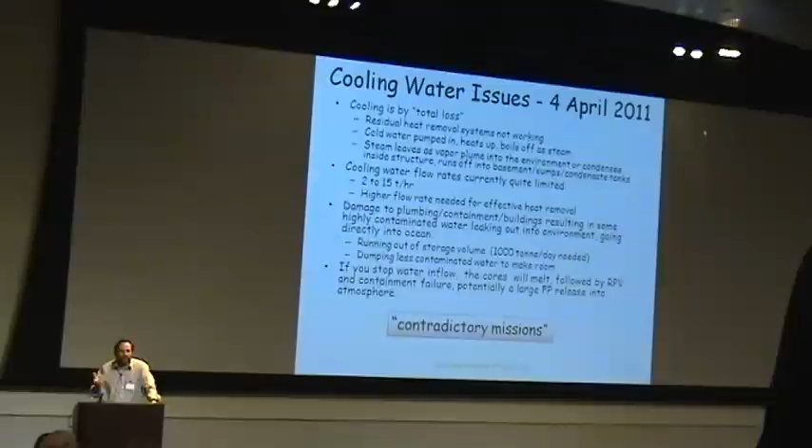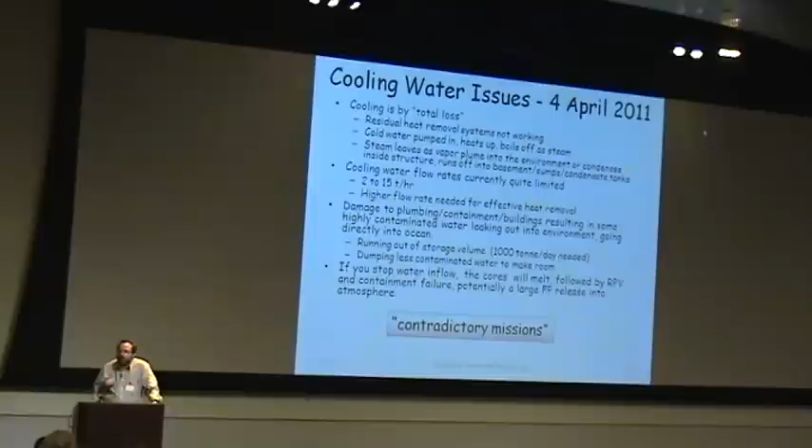I think there are a lot of things about how we do this as a society, and specifically a subset of the society as engineers — how regulators, vendors, operators, and analysts who work independently from organizations like the National Laboratory and universities interact and how we have this discussion about safety. I think that's something we really need to spend a lot of time thinking about, because one of the things that drives all these evaluations — and just to really impress you about how much I've thought about this — I'll show you some other slides.

So here's the last big evaluation that was done in this area. This was called NUREG-1150, and it came out in the early 1990s. This was an evaluation where they tried to go through and do systems analysis, probabilistic risk assessment, and a lot of engineering analysis, with a large number of folks involved — people from national laboratories, people from the NRC, people from the vendors, GE, Hitachi, Westinghouse, and so on. At the end of the day, they decided that indeed a big contributor to the risk was in fact these seismic events and this LOSP, loss of offsite power, which is exactly what we had. In fact, we knew exquisitely — and one of the reasons why I was able to understand what's going on when I'm looking at this progression of things — these accidents were analyzed over and over again, and the conclusions that were reached always were that, yes, this was a very bad thing.

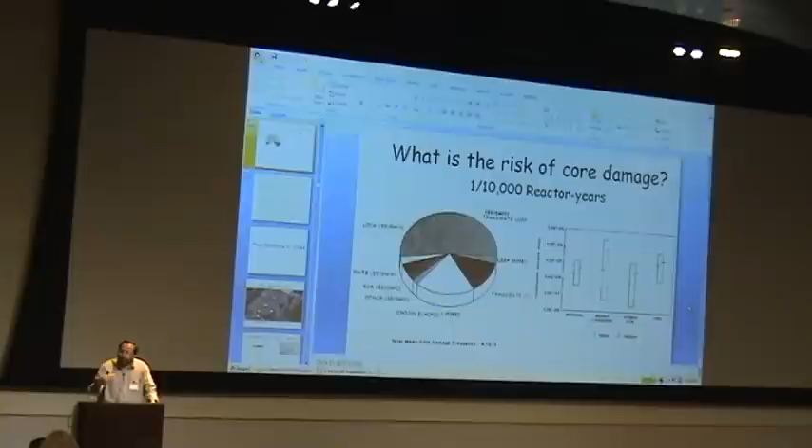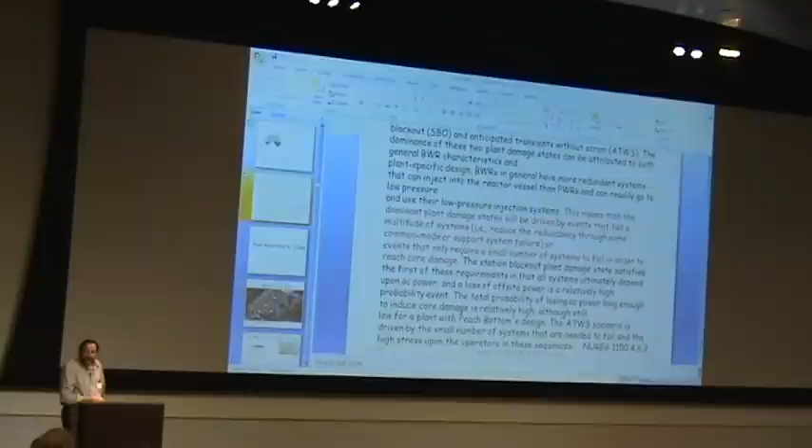One should never have a long-term station blackout, and one should never have long-term loss of offsite power. At the end of the day, we put in backup systems. One of the problems pointed out by those who evaluated this study is that the dominant damage states will be driven by events that fail a multitude of systems, reducing redundancies through common mode support system failure. That is exactly what happened here. We know in complete detail why this happened, and it's not a surprise. But the problem is there were evaluations made about the probabilities of recovering offsite power and recovering the generators, and those evaluations simply did not account for the circumstances that were here.

So we have to ask, did we do it wrong in the sense that we didn't pick the right set of events? We should have picked a 9. But I can tell you what the conversation in the room would be like: 'A 9? What's the probability of having an earthquake of that magnitude, and then a tsunami of that magnitude, all at the same time?' They've struggled with the probability of seismic failure for a long time. There are a lot of studies on it, going on for 30 years. Lawrence Livermore Laboratories got involved, and there was a lot of controversy. In fact, in NUREG 1150 there are two different sets of results, depending on who predicted the seismicity.

At the end of the day, like a lot of things you look at in engineering systems that you all build and analyze, there's something called engineering judgment. Engineering judgment comes into many of these areas, and unfortunately the engineering judgments made in this case were not the correct ones for this event. So we're going to argue about event trees, we're going to argue about what the safety basis is, and you're going to see a long, protracted discussion. That's what happened with Three Mile Island, which was, by the way, a relatively innocuous and benign accident in comparison to this one. But we did soul searching for 15 years after that.

My experience is it's always very easy for us to look at what was done in the 1960s and 1970s and go back and say, 'ha, for crying out loud, why did you do it that way?' But I can point to any number of aerospace systems that were designed the same way. We all know that our thinking about these things has evolved over time.

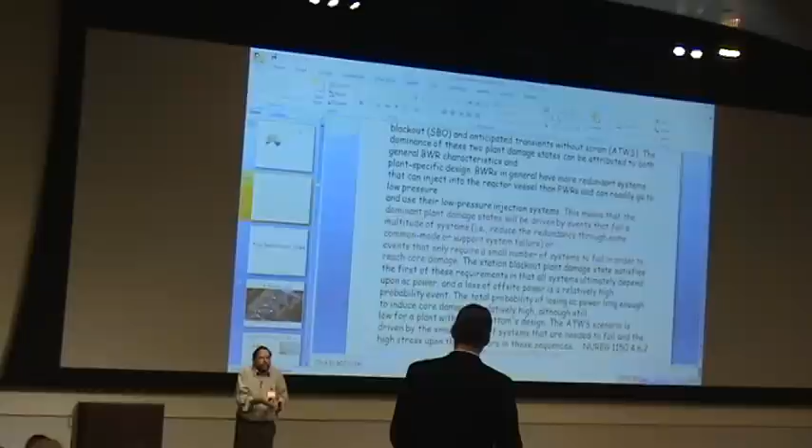So the question now is really going to be, do you go back to these plants, which are now 30 and 40 years old? A number of these plants around the world are in a situation where they're going to ask for having their licenses extended, since that's economical. Now the question we have as a society is, should we do that with an old plant that has features in it that, now that we look at it with these new eyes and in terms of these accidents, we might say we shouldn't have done that? But how much is it going to cost them to pull all that stuff out from the turbine motor base? How much is it going to cost them to change the whole safety systems?

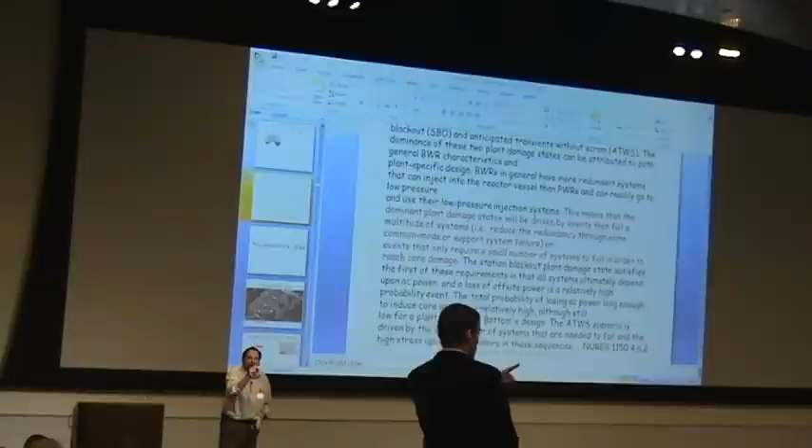At the end of the day, of course, these plants are a complete economic write-off anyway. They're gone, right, they're finished with this. It's pretty clear looking at it. But that's going to be the question for us: what's the trade-off in backfitting these plants, and where are we going to make the trade-offs in building new plants? I think that's a real substantive issue for us to grapple with as we move forward.

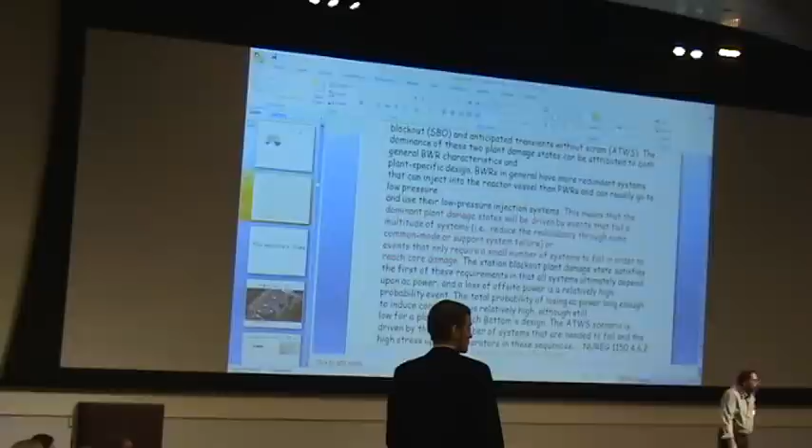You indicated that the cooling would have to go on for years before these are stabilized. Would you be willing to tell us the worst case scenario, like if there are more earthquakes, tsunamis, and they can't do the cooling? What is the worst case? We can all imagine what's worst case, I don't want to go into that. Okay, very good.